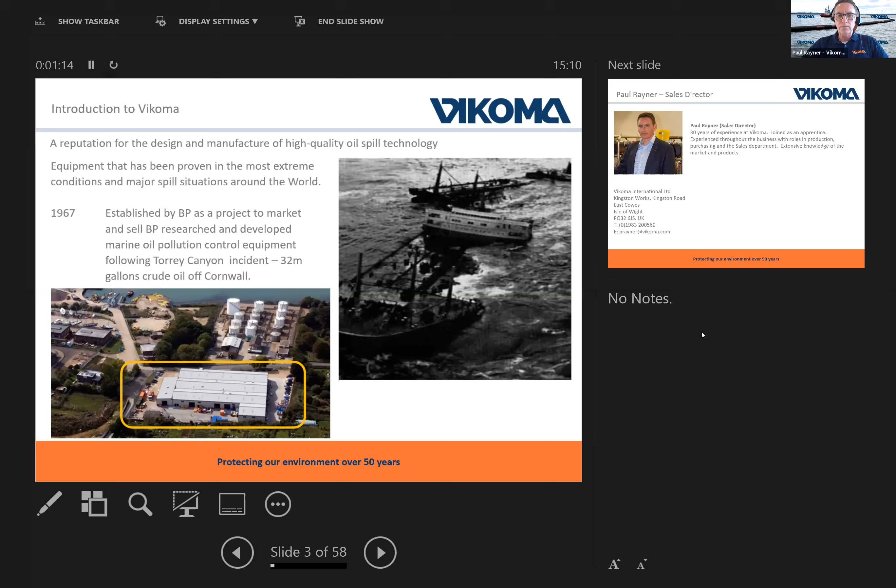Myself, Paul Rayner, Sales Director. I've been with the company, it'll be 30 years next year, and throughout that time I've worked in many departments, a lot of time spent within sales, and as Mark said, a lot of time traveling around the world. Not directly involved with incidents, but a lot of time spent with responders and people actually dealing with oil spills. So a big part of my job and my team's has been to understand the issues that responders have and then feed it back into our development program.

We're an ISO 9001 company, and had the joy of going through the latest version of accreditation, 2015. Importantly, that covers everything within our business - not just sales and development, but manufacture, design, installation, commissioning and training. So it's important to look at all those aspects being covered under the ISO 9001 quality umbrella.

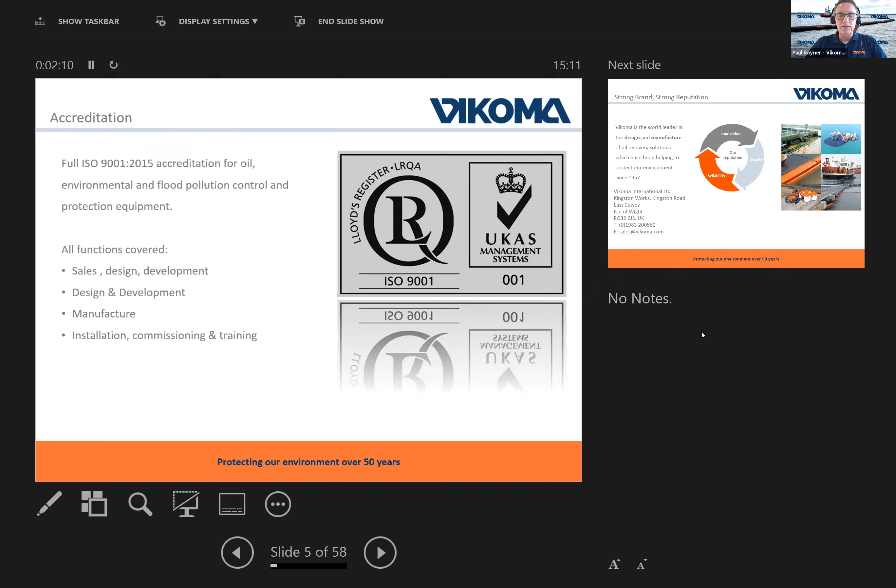Vikoma prides itself on three core values: quality, reliability, and innovation. Quality products that will work when they need to. As you all know, there's not an oil spill every day, but when it does happen, you need the equipment to work. So that's very much the sales pitch.

So what I was asked to look at today was oil spill booms. I thought if you look at the membership of UK Spill, it's very varied. Most people think of oil spill and think of tankers, offshore, major spills. But there are as many spills, far more actually, in ports and harbors, inland - pipelines, rivers, lakes, industrial culverts, industrial sites. So it's not all about big offshore booms.

So today's presentation, I'm really going to cover the main part of what is about containment. I'm going to talk about different types of boom and how I see the pros and cons, and the feedback I've had over the last 20, 30 years from responders on the pros and cons of the different types of boom.

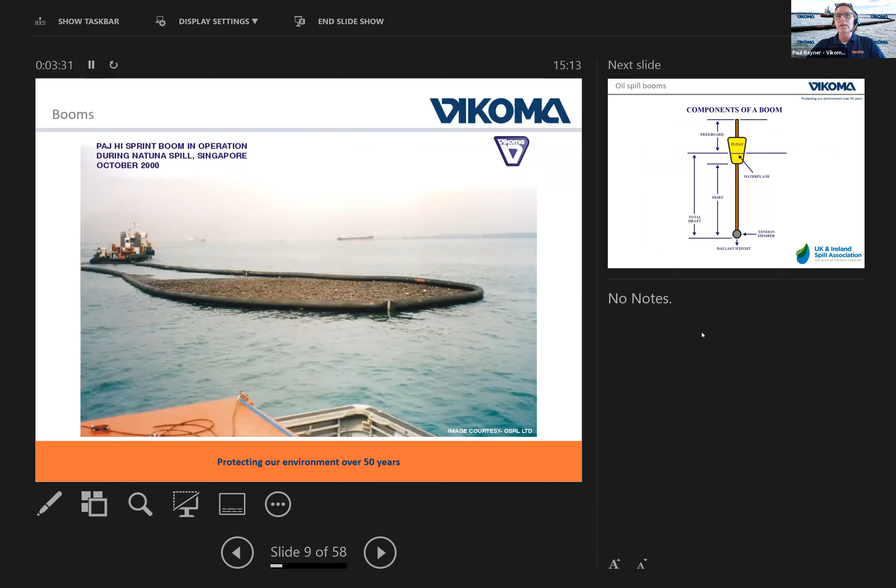So typically, a good picture there - you can see boom being used to contain on a lovely day, lovely spill conditions, nice calm sea - very rarely happens. So how we select booms is really important to what you're trying to achieve as a responder, how you're going to deal with that spill, what type of boom you're going to use and how you're going to use it.

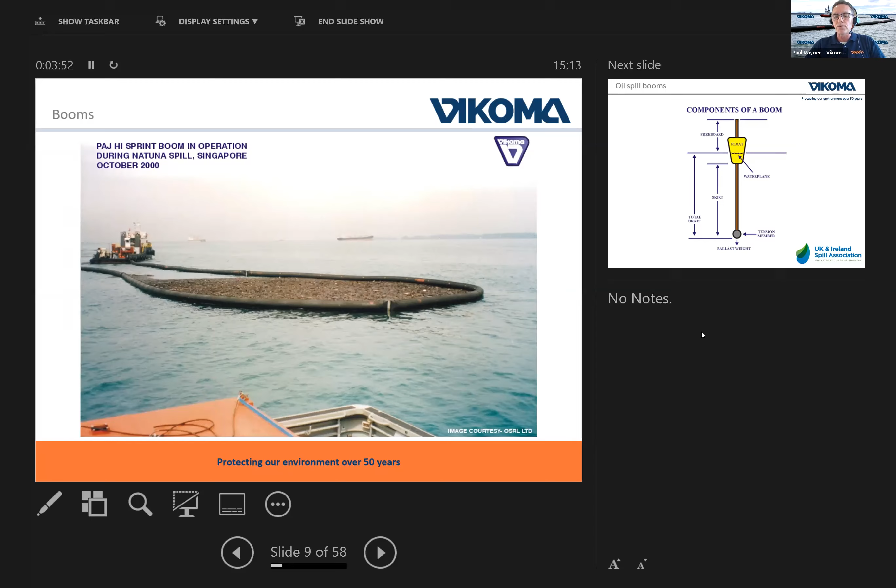So if you start from the real basics of what is a boom, it really is a floating barrier that goes on the water. The components, as just about any book will describe, include some form of float, a freeboard that is above the water, and a draft, usually the skirt below the water. There's a plethora of different versions of what makes up these barriers - I've seen everything from logs being used to really high-tech technical booming systems. But basically they still have the same principles: what's above the water, what's below the water, and the principle of stopping the spill spreading and containing it so you can effectively use your skimming systems to recover it.

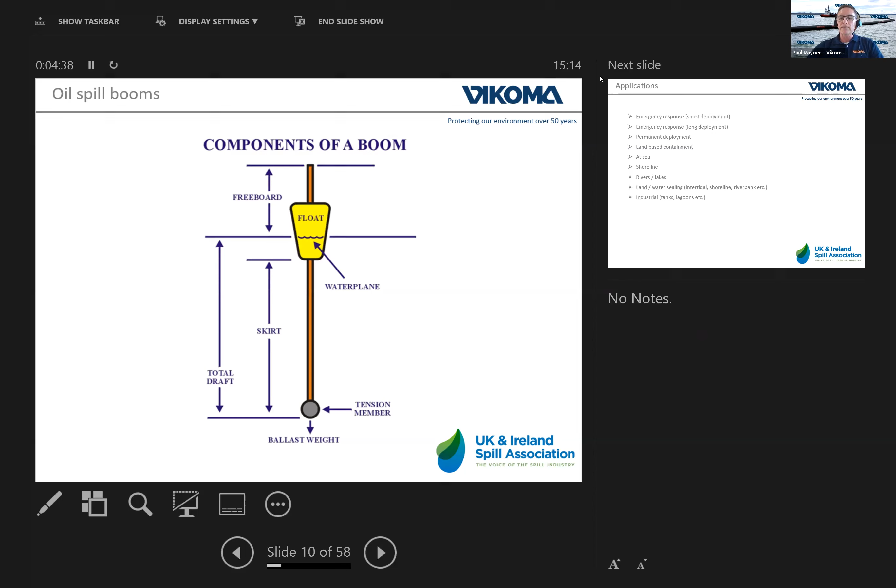So I was trying to think of what are the applications, and there are many different applications. Not only emergency response, which is generally a relatively short-term deployment, but there can be emergency response which is a long-term deployment. So this can be short-term hours, long-term days, weeks, even months.

There's also booms used for permanent deployment, to permanently protect an area, either to stop a spill getting in or to stop a spill getting out. There's also land-based containment - sealing off shorelines, beaches, riverbanks, etc. So you can see straight away how one boom is not going to fit all of these applications. Even down to industrial - we often supply boom systems for fitting into API separators in refineries and petrochemical plants, completely different to response booms. So it really is understanding what your application is.

Many responders have the challenge that they actually respond to many different applications. So it's having a toolbox of different techniques, methods, and equipment, which will allow them to effectively do that.

So I started listing out what I thought was the issues with boom, what really matters. And I came up with a massive list. And I'm sure as experienced responders that many of you are, you could add to this list. But there were simple things like safety, weight, ease of cleaning, ease of use.

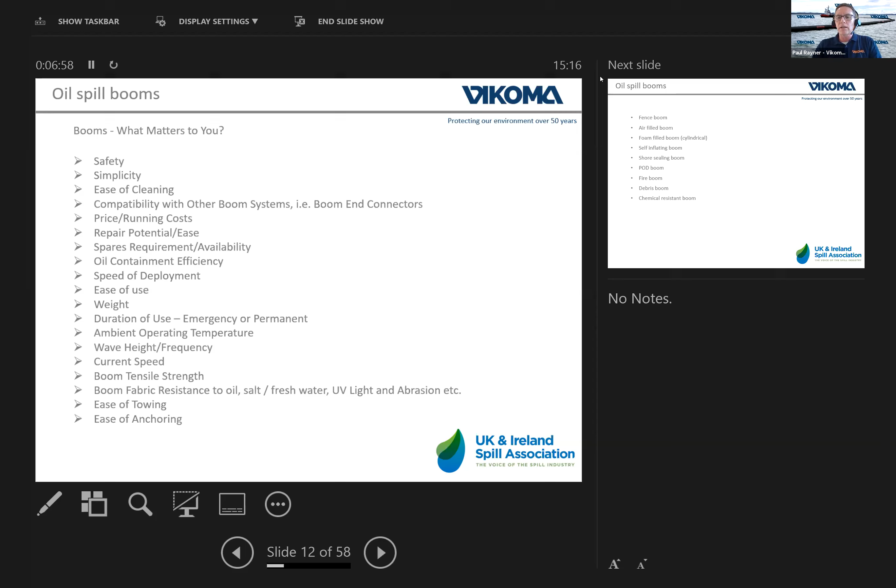So if you look at the types of boom, if you look at the terminology, there are several different types - fence booms, air-filled booms, foam-filled booms, self-inflating booms, shore sealing booms, pod booms, fire booms, debris booms, chemical resistant booms, and that's without going into things like absorbent booms. So you already have this great big list of different types of booms, but what does it really mean?

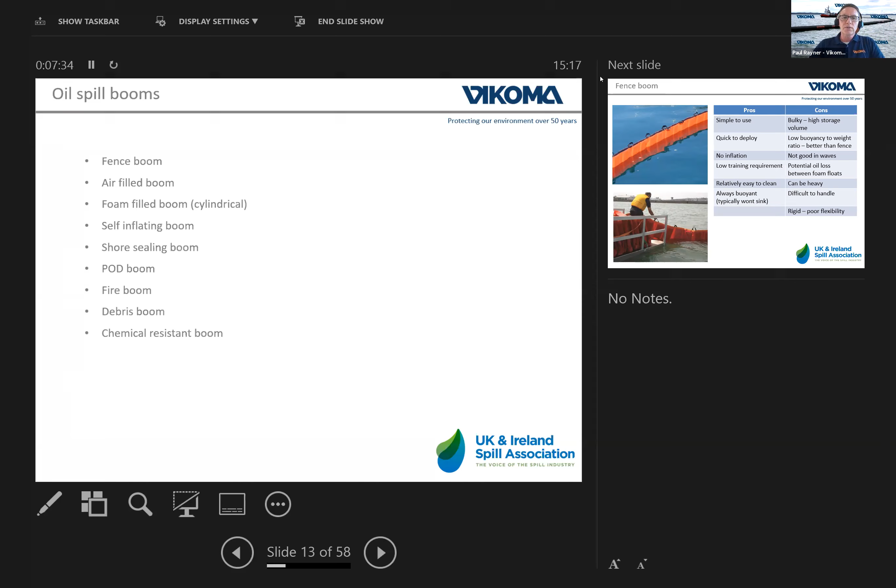I actually thought a very simple way to look at this was to look at some pros and cons. Now this isn't just a sales director's opinion. This is very much feedback that I've had over the years from responders, people actually using these types of booms. So I'm not going to go through all of them verbatim, but if you look at the key points...

Fence booms - really easy to use, really easy to deploy, low training requirement, relatively easy to clean. They won't sink because they've got foam inside. Sounds great. What are the cons?

Big and bulky, can be really heavy. They have a tendency to fall over when it's windy. They're not great in wave conditions. The potential loss of oil between the floats. They can be difficult to handle and they can be rigid with poor flexibility. So some really good points, some really challenging points.

So it really is weighing up what you're trying to achieve. I've seen people that have used fence boom really effectively in ports and harbours and rivers. And then I've seen people try to put fence booms out at sea. It's been windy and the fence booms literally fell over and is planing across the water and not containing any oil whatsoever.

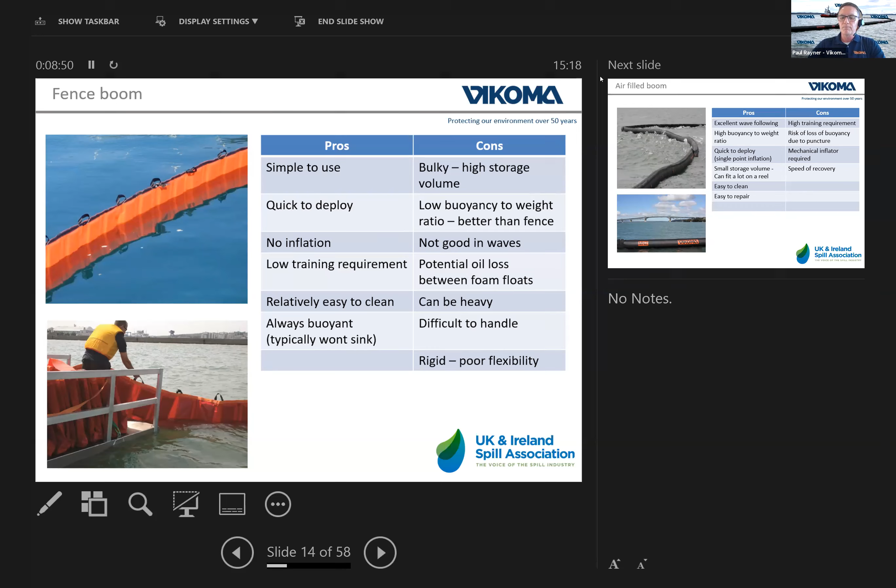If you look at air-filled booms, probably one of the biggest and best known range of booms for offshore use. So really good pros - excellent wave following, generally really good high buoyancy to weight ratio. This means they're able to react to waves. They can be really quick to deploy. So if you take Vikoma, we have single point inflation with our Hi-Sprint boom, which allows really rapid deployment.

Generally small volume, because it's air inflated buoyancy, you can store them on reels, so you can have quite a lot of boom on one reel. They're generally easy to repair.

What are the cons? Generally, you need a higher training requirement. You need people who know what they're doing. There could be a risk of buoyancy loss due to puncturing. You do need mechanical inflation. They can be slower to recover. So again, it's about weighing up the different pros and cons of each boom system.

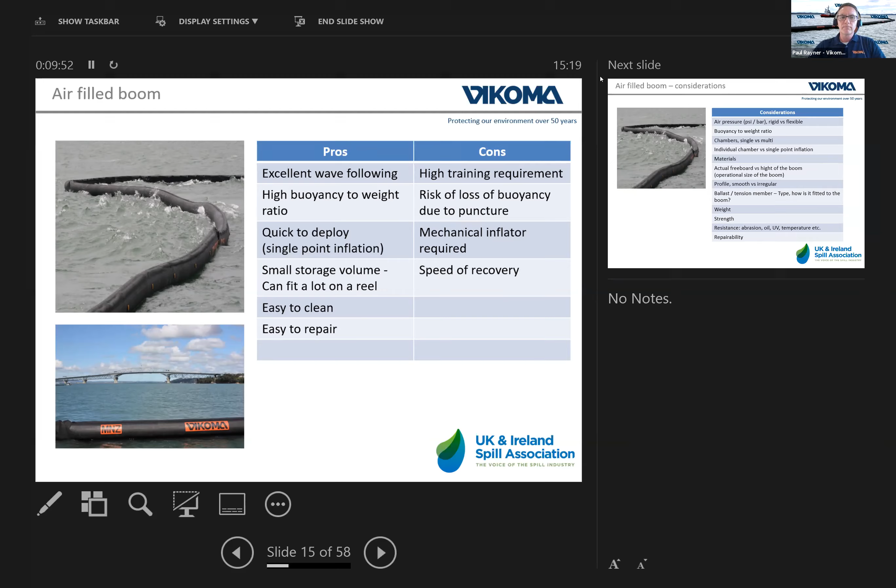And if you look specifically around air-filled booms, what are the considerations? Air pressure, for example, whether it's in PSI or bar - what does it mean?

Low air pressure is flexible, higher air pressure is more rigid. So this is how it's going to react in a wave condition. Something that's hard and rigid is going to be difficult to move around. Something that's soft and flexible will easily move around.

Considerations like chambers, one chamber or multiple chambers - this is going to give you more integrity. The types of material, the actual measurements of freeboard and draft. Operationally, what are the measurements?

I've seen many people talk about huge booms, but how big are they when they're inflated and actually in the water? I've seen tenders which state the flat width of a boom. Well, you don't use a boom when it's flat, you use it when it's inflated.

The profile of the boom, smooth versus irregular, how that might affect oil loss. What sort of tension or ballast member is used and how is it fitted to the boom?

What's the strength of the boom? What's the weight of the boom? How easy is it to repair? What's its abrasion resistance? If this is going to be dragged across a quayside or dragged down a pontoon, then you could well have issues with abrasion.

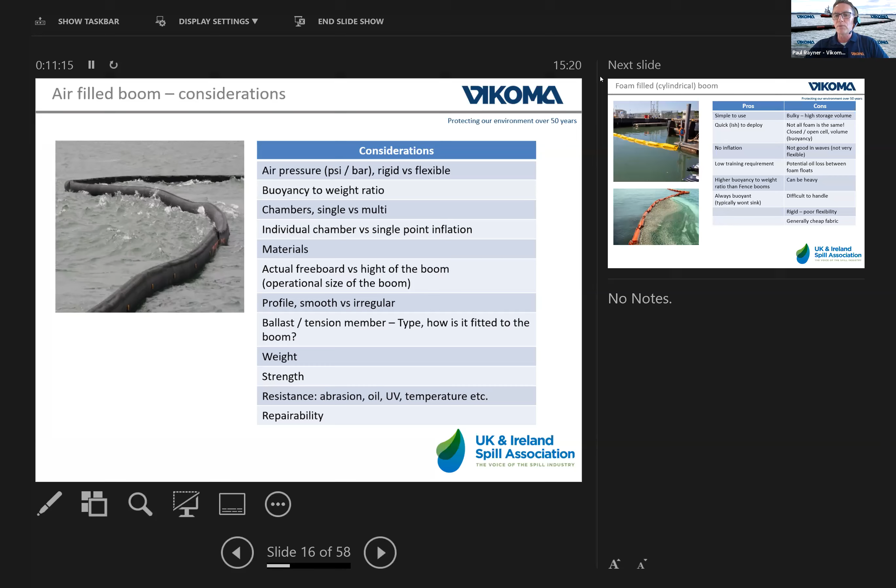A very common boom, particularly in the States, is foam-filled cylindrical boom, often referred to as contractor boom. So again, you look at this, really simple to use. If you go to spills like the Macondo spill, they used miles and miles of this sort of boom. Really quick to deploy, no inflation, low training, higher buoyancy to weight ratio than fence booms because it's cylindrical foam, and they won't sink.

What are the cons? They're big, they're bulky. Not all people use closed cell foam. I've seen wonderful fence booms and cylindrical foam-filled booms with open cell foam. Open cell foam is a sponge - it gets wet, it fills with water, it sinks. They're not overly great in waves because each one of those foam billets is rigid. They can be difficult to handle, heavy to use, heavy to pick up. Generally they're lower cost fabrics because a lot of the strength goes into the tension members. So again, pros and cons.

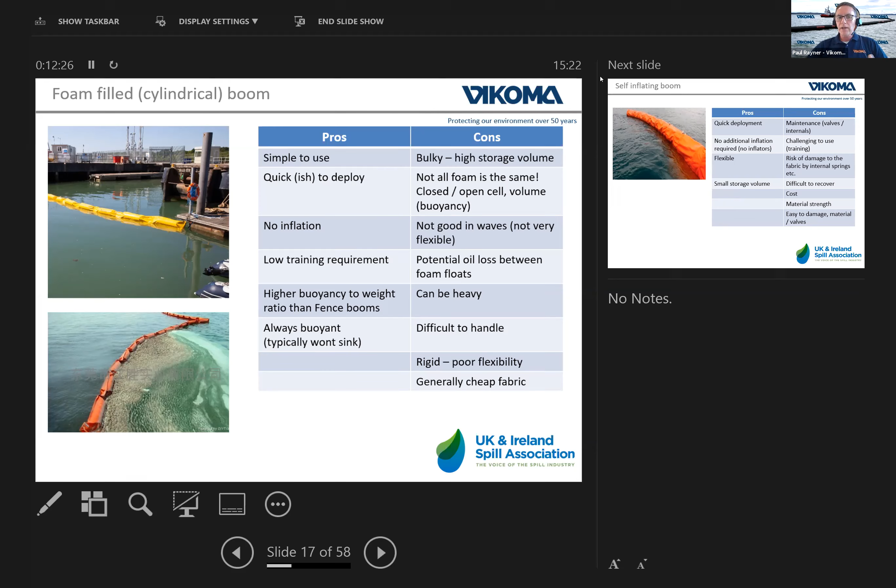Self-inflating boom - this was really popular many years ago. When I first came into the industry, everyone was talking about self-inflating boom. Great, you can chuck it out and it inflates very quickly. So again, the pros: quick to deploy, very important in a spill, generally flexible because it's air-filled, small volume.

What are the cons? Maintenance - you've got all these internals inside this boom, metal and plastics inside a fabric bag. They can be difficult to recover, expensive, and easy to damage because some will have valves poking out the top, some will have mechanical springs inside. So again, really weighing up what you're trying to achieve, the level of skill you have as responders, and how easy you can use this equipment.

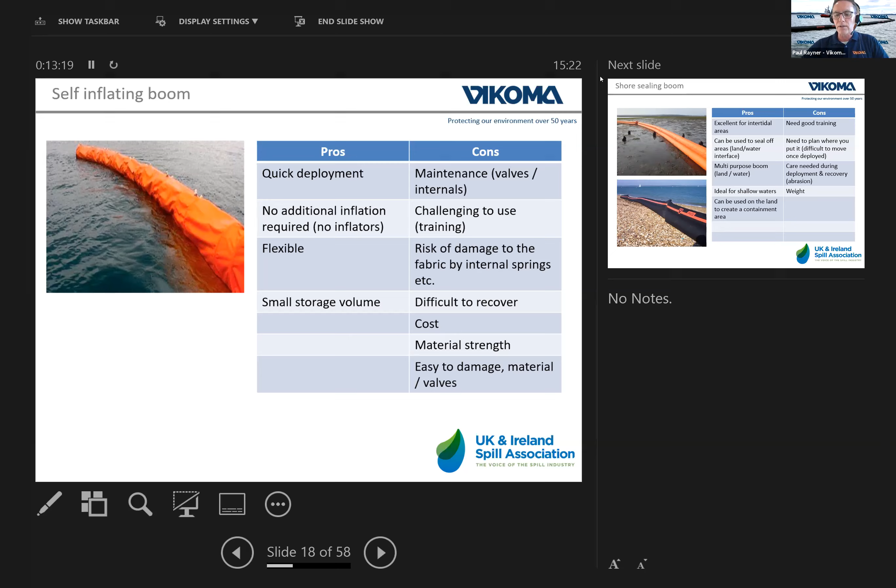Shore sealing booms - originally designed for that intertidal interface between the water and the land, but often used on land spills, not just for the beach where it was originally designed many years ago. This is excellent for intertidal areas, seals against the ground at low tide, and floats when the water comes in - ideal for sealing off. Some crossover for holding back water too, for sealing off an area during operations. Very recently, a lot of Vikoma boom was used on a salvage operation where Shore Guardian boom surrounded a vessel being dismantled and salvaged, so it can be used on land as well as this land-water interface.

The cons though: you need good training, people who know what they're doing. Once you put them out and filled them with water, they're not going to move unless they're floating, so you need to think about and plan how you're going to use it and where you're going to put it. Definite care needs to be taken during deployment and recovery because of abrasion - these are designed to sit on the ground, so it's no good having a weak, low-cost material that's going to wear through quickly, because you'll lose the effectiveness of that boom.

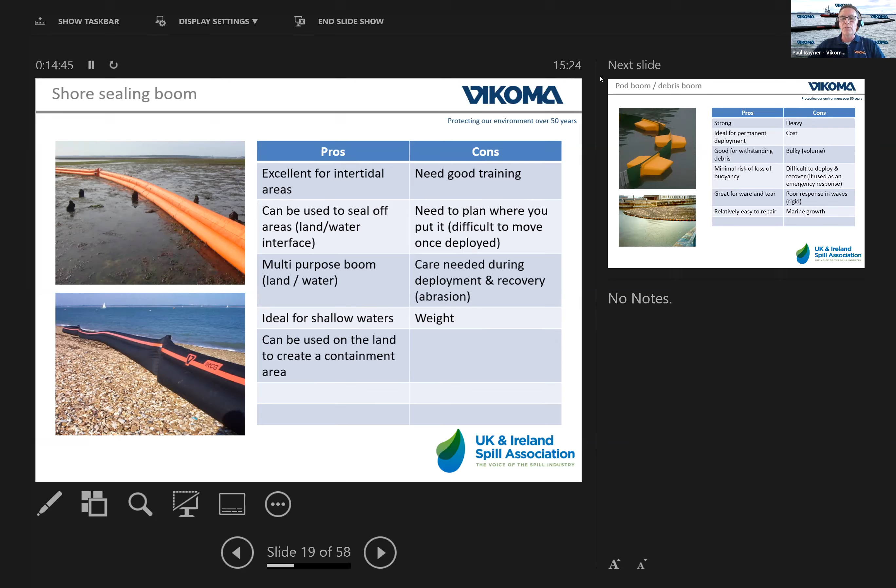There's also pod or debris booms. These are really strong booms, often used to hold back debris as well as oil. The pros: really strong, ideal for permanent deployment, good at withstanding debris, usually made of high strength materials, good for impact, great for wear and tear, and relatively easy to repair.

A lot of the pods are bolted to the belting. What are the cons? Heavy, really difficult to deploy, so they're not ideal for emergency response. They can be incredibly bulky. So how are you going to pick them up? How are you going to move them? How are you going to deploy them?

And there can be big issues with marine growth, the same as with any permanent boom. Once a boom is deployed permanently, marine growth often starts growing onto it, basically reducing the buoyancy because of the extra weight. I've seen permanent boom that hasn't been maintained basically starting to sink. But with all these things, pros and cons, what are you trying to achieve? What's your objective?

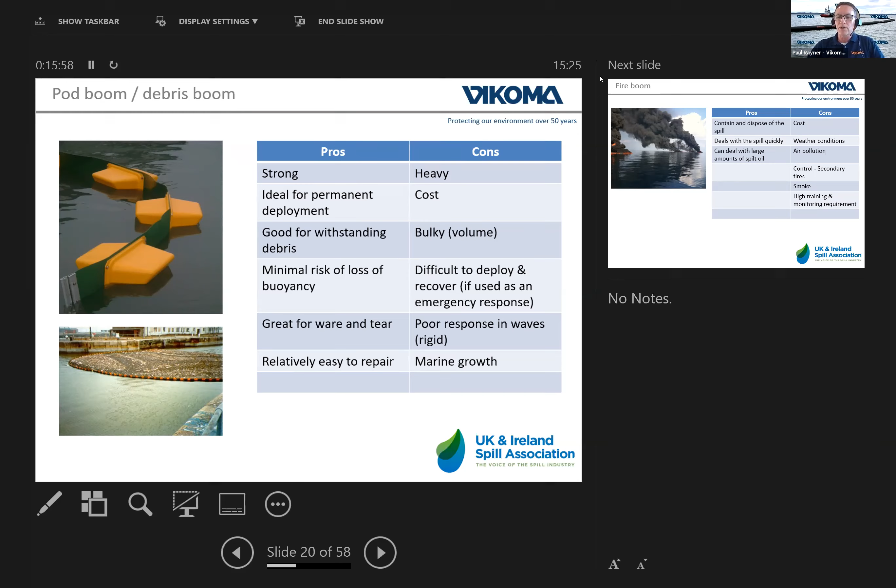Going to touch on fireboom really briefly. I believe it's a subject for a future webinar. There was really great publicity for firebooms during the Macondo spill - the ability to contain and dispose of the spill in one go. It can be done quickly because you're disposing with it, and it can deal with large amounts of oil.

What are the cons? Costs, weather conditions, air pollution, and training again - having the correct level of training. You'll see a theme through all of these boom types: generally, unless it's a simple throw-it-in fence boom or contractor boom, you do need well-trained people. I believe Mark will cover some of the issues around training.

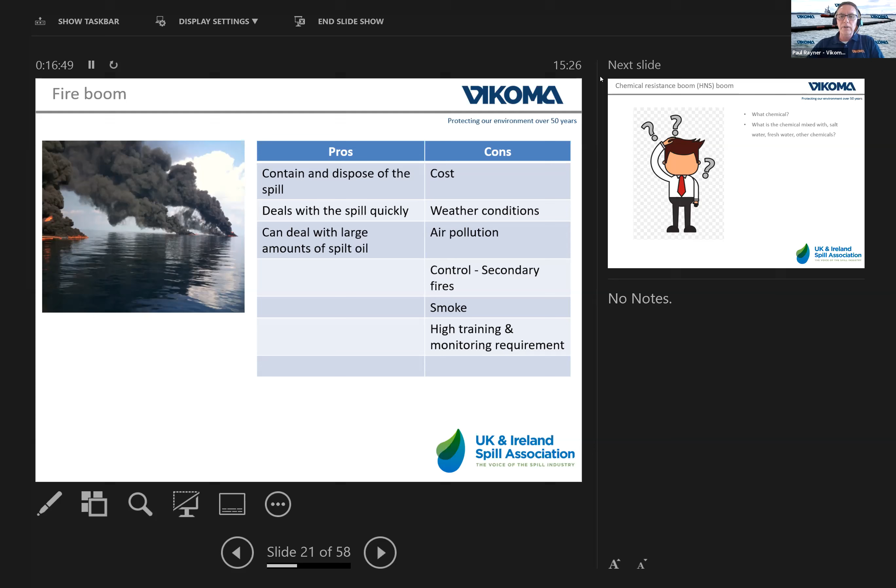I thought it poignant to touch on chemically resistant booms. There's a lot of talk about HNS within OPRC, so booms that are going to be able to hold back chemicals. I thought about trying to put a picture on this and thought three question marks with someone scratching their head was probably a good way of doing it.

What's the chemical? What happens when it mixes with the water? Is it salt water? Is it fresh water? Is it mixed with other chemicals? How diluted is it? What's it going to do to the material? I see this as a really big challenge for the industry going forward as HNS protocols are adopted as part of OPRC legislation. What equipment are we going to use?

There's a lot of equipment for land-based HNS, but for marine-based, some chemicals you can't see them, some chemicals you can't go anywhere near them, some chemicals will destroy things. I think this is going to be an interesting subject over the next few years as both the legislation rolls out and the industry adapts to be able to deal with it.

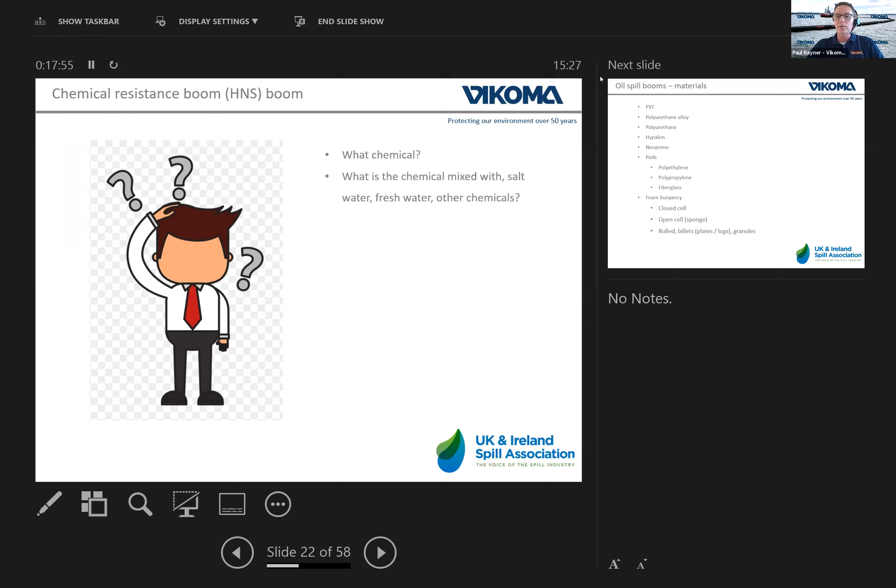If you look at all those types of boom, one of the key elements, one of the most important things, is the materials they're made of. Generally speaking, there are a couple of groups of materials: thermoplastics like PVC and polyurethane alloys, and rubber products like Hypalon and neoprene. Then if you go into things like pods, it's often polyethylene, polypropylene, or even fiberglass.

It's important to note there's a huge difference in what all of these materials are. As I mentioned earlier on foam - closed cell foam versus open cell foam, rolled billets, plates, logs, granules - they're all factors you need to consider when you're actually purchasing a boom.

People will talk about, okay, I know exactly what I need, I want a cheap boom, I'm going to make it out of PVC. Nothing wrong with PVC, fantastic material. But how long do you want the boom to last? What are you going to do with it afterwards?

How are you going to clean it? If you've got to dispose of it, where can you dispose of it? How can you dispose of it? What's the life cost of that boom?

People have said to me, Vikoma is well known for neoprene booms like Hi-Sprint, and they'll say I can buy 2 or 3 PVC booms for that cost. And I said, yes you can, but you've got to dispose of those 2 or 3 PVC booms, and you can still use my neoprene boom. So what's the cost of that disposal? What's the cost of replacing it? What's the cost of purchase?

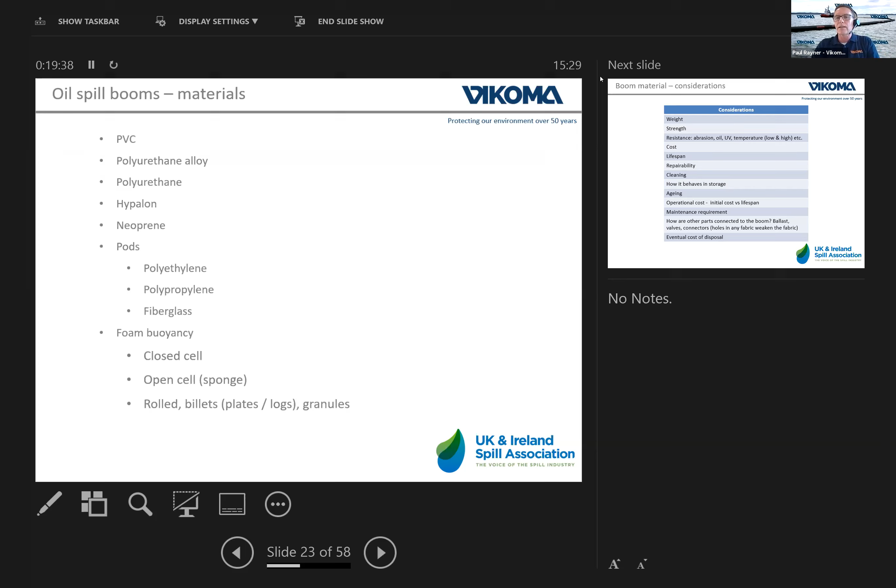So it's quite an interesting point to understand the different types of material used in oil spill booms. Again, I thought it useful to put in some considerations, things like weight - I could make a bulletproof boom out of fiberglass, but you'd never pick it up. The strength, its resistance to things - quite important things for an oil spill - abrasion, oil.

It's quite important to know how good it is with oil, UV, and temperature, both low and high. Low temperature is a big issue with thermoplastics.

High temperature is a big issue with thermoplastics. Where are you going to operate? Perhaps low temperature is not an issue to you, but UV light is. If you're going to deploy for long periods of time, what is the UV breakdown likely to cause to that material? What's the lifespan, how long is it going to last?

Remember, a lot of the time this is in storage. How long can you store it? What conditions are you going to store it in? How easy is it to clean? What are the issues as it ages? How much will it cost to look after it?

How are other pieces connected to that material? If you think of any fabric material, as soon as I start making holes in it, putting bolts in it or valves in it, I actually start damaging that material. So it's really important to think about how items like connectors and valves are fitted into these booms, into these fabric products.

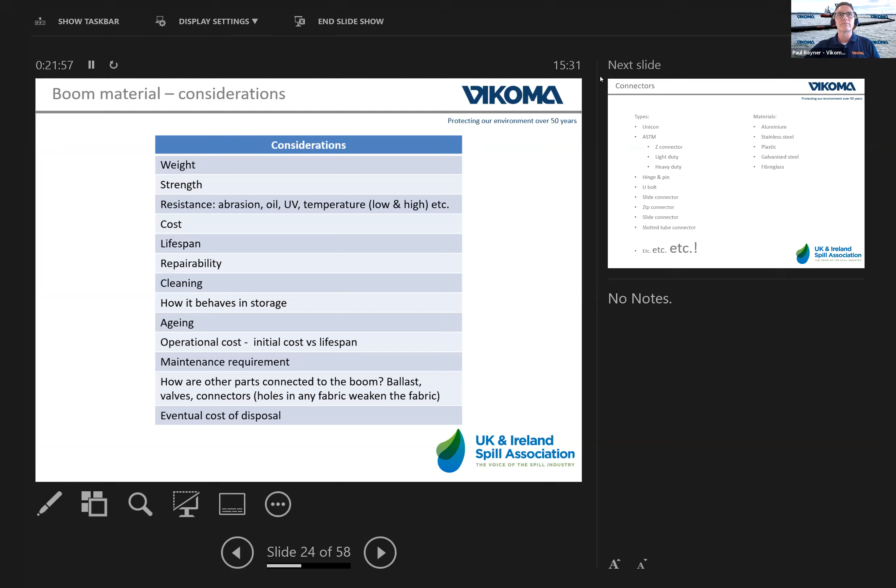I then thought a useful topic to cover would be connectors, and then I realized how complicated this was. So I started listing out connectors: Vikoma, well known for Unicon, ASTM, a US standard quite well adopted across the world, but there are several types of ASTM connector—hinge and pin, U-bolt, slide bolt, zip, slotted, and on and on.

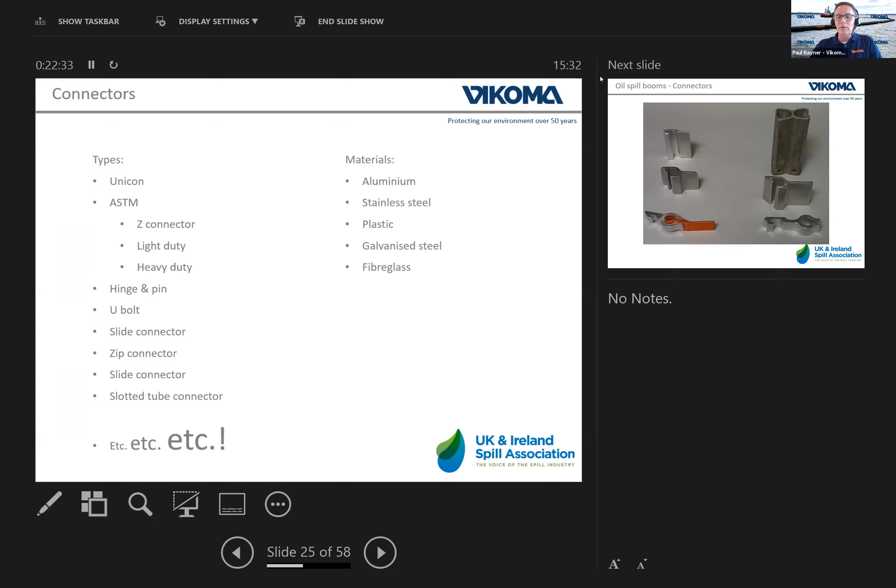There's also the materials of what those connectors are made of: aluminium, stainless steel, plastic, galvanized, fiberglass—a whole plethora of materials. So I thought I'd get some pictures, lots and lots of different types of connector, even more different types of connector. Lo and behold, they don't all fit together.

So we were talking in previous webinars about standards. ASTM in the States have tried to push these standards so that booms can connect together, but this is only really widely adopted in the States. Even there, there are a plethora of different types of connector, and they do not connect together. It really is the square peg in a round hole. So it's really important to understand what type of connector, how that's fitted on the boom, and then how you use it.

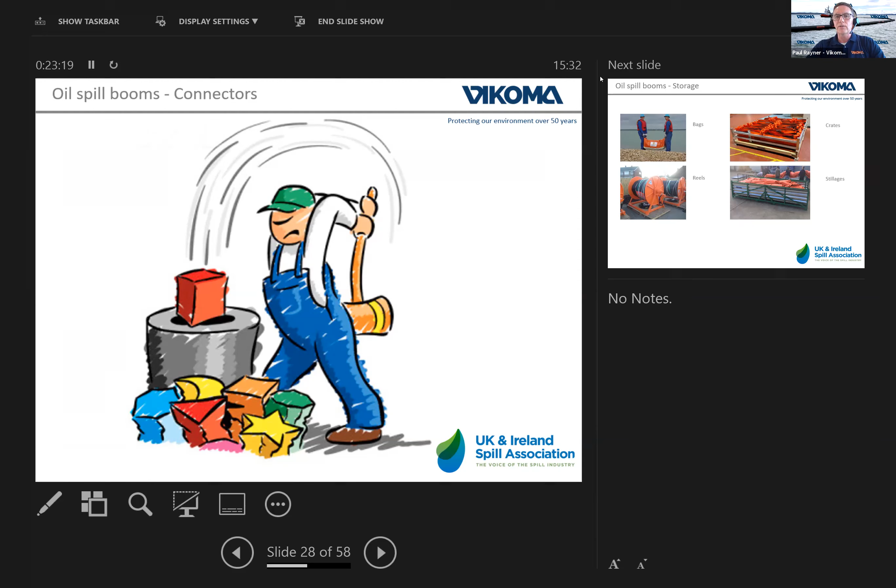I then thought it useful to talk a little bit about storage. Everyone thinks about the oil spill boom, but 90% of the time it's in storage. So how are you looking after it? How are you storing that—whether it's bags, reels, crates, stillages.

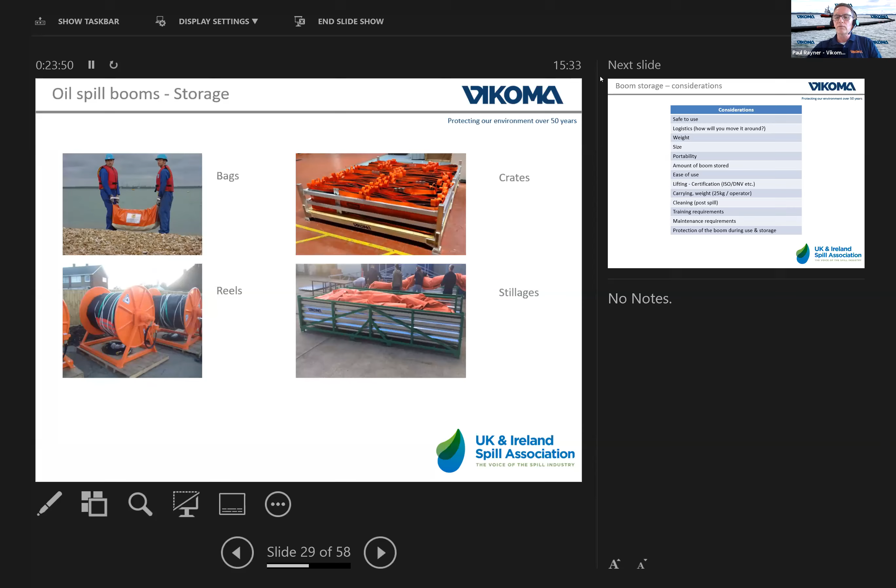All of these things are quite important to understand when you're initially purchasing. How are you going to look after it? How are these different types of storage going to be employed for deployment and recovery of that boom? Unfortunately, in my experience, a lot of the time people do forget about it. So considerations: weight, logistics, how am I going to move that around?

I've seen people say, great, I want a reel. And I say, great, where's your crane? I haven't got one of those. Well, how are you going to move it? I've got a fork truck. How are you going to take that on the beach if you need to take the reel down there? So it's really important to understand the logistics.

If you're going to have bags, carrying weight for one operator is 25 kilos—no good having a boom that's 200 kilos if you're expecting people to pick it up and carry it. Training requirements: how are you going to use that? Storage when it's not in use—where are you going to put it? Is it going to be indoors? Is it temperature controlled if you've got extreme climates?

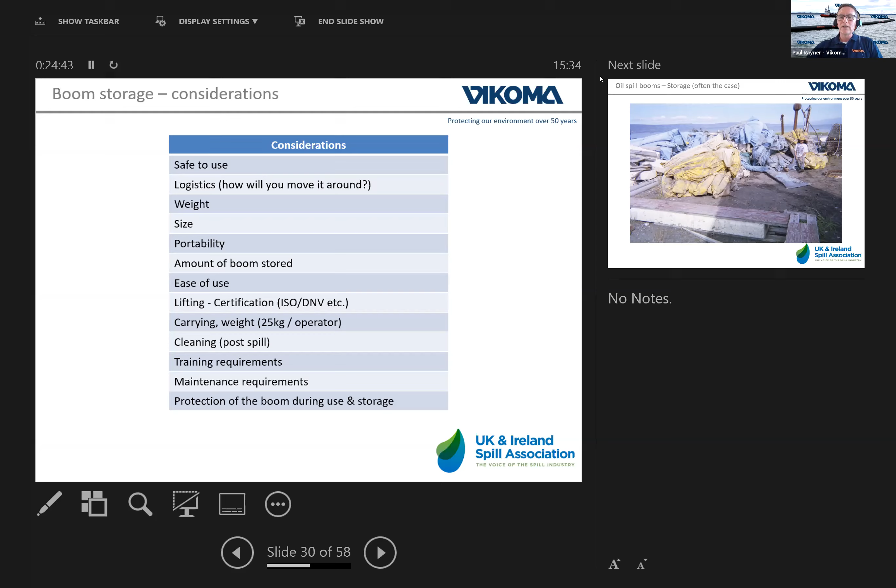In my experience, unfortunately, a lot of booms—that's how it's stored. Great big heap, not cleaned up very well, but that's expected to work next time there's a spill. I made sure that it wasn't anyone I knew, but these are definitely things to consider.

And then, to wrap things up, how do you go about repairing booms? Now, we all know, no matter how well trained you are, no matter how well planned you've done things, accidents will happen. There'll be debris in the water or things will get abraded.

So what are the different methods? Very typically, cold glue, like fixing a bicycle repair. Vulcanized, something Vikoma is really well known for, where we can repair the boom as strong as the original manufacturing. Mechanical seals - if you've got a rip, you can put one of these and clamp a seal over the hole.

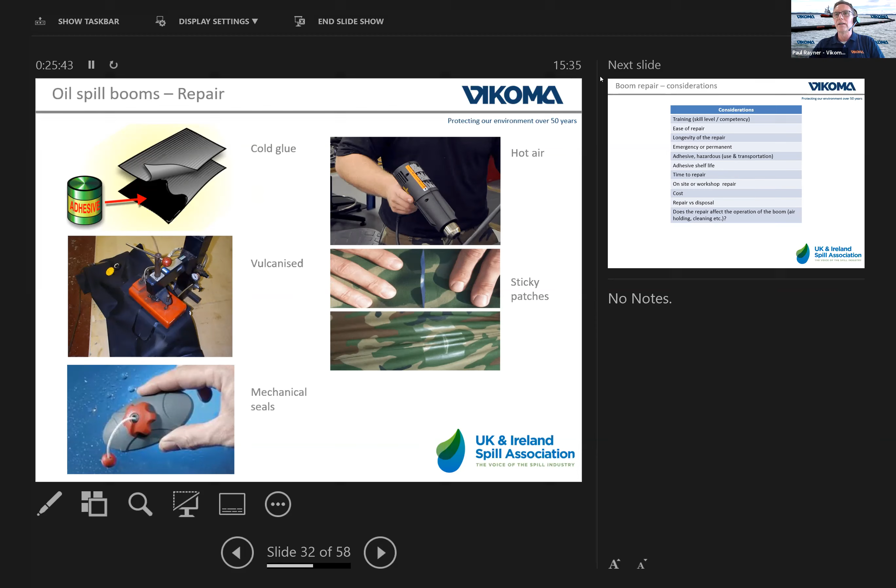Hot air. Sounds easy. One of the most difficult repairs I've ever tried to do in my life - really easy to burn a hole straight through the boom. Sticky patches - you can actually repair a boom with a sticking plaster.

But again, what are the considerations? Training and competency, ease of repair, longevity of repair. If you're using adhesive, what's the shelf life? Once you open that 5-litre tin and you only use half a litre of it, how long does that adhesive last after you've opened it?

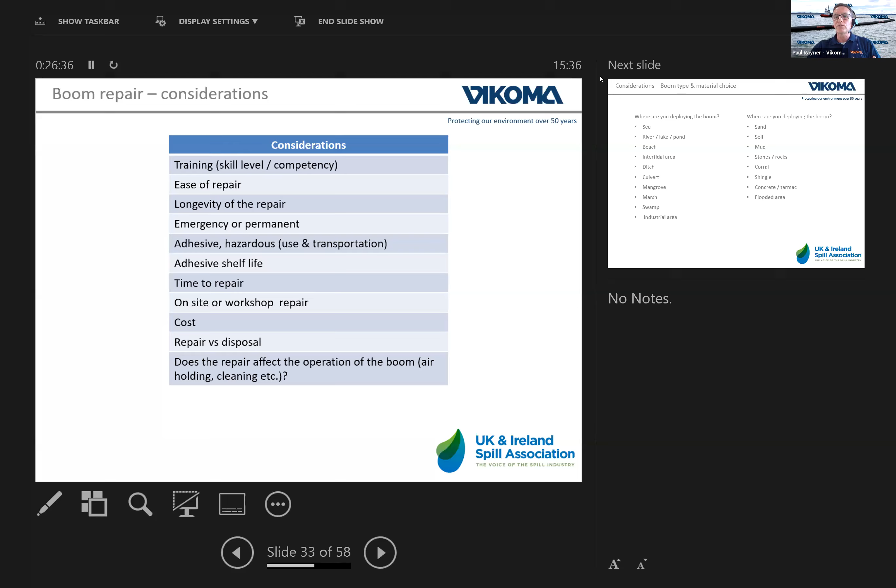Can you do a repair on site at the spill site and still go on dealing with the spill, or does it need to go back to the workshop? Repair versus disposal - when is it commercially viable to repair versus commercially viable to dispose? And most importantly, does the repair affect the operation of the boom itself? This is not only the air holding, if it's air filled, but how you clean it afterwards. Are you going to actually cause more damage? All important things to consider.

I thought the other things to consider would be things like, where are you deploying? What is the application? Deploying at sea is completely different to deploying in a swamp, completely different to an industrial area, completely different to a mangrove, completely different to a beach.

If you're deploying in an area where there's land involved, or it's going to drag on the bottom of the seabed, or it's shallow water - what sort of area are you deploying in? Sand, soil, mud, coral, shingle, tarmac. It could be a flooded area where you've got tarmac but lots of water. You could have areas where it's merrily floating in the water, no problem, and then as the tide goes out and recedes, you're suddenly on top of coral. And coral will rip fabric to pieces. So very important to understand what it is.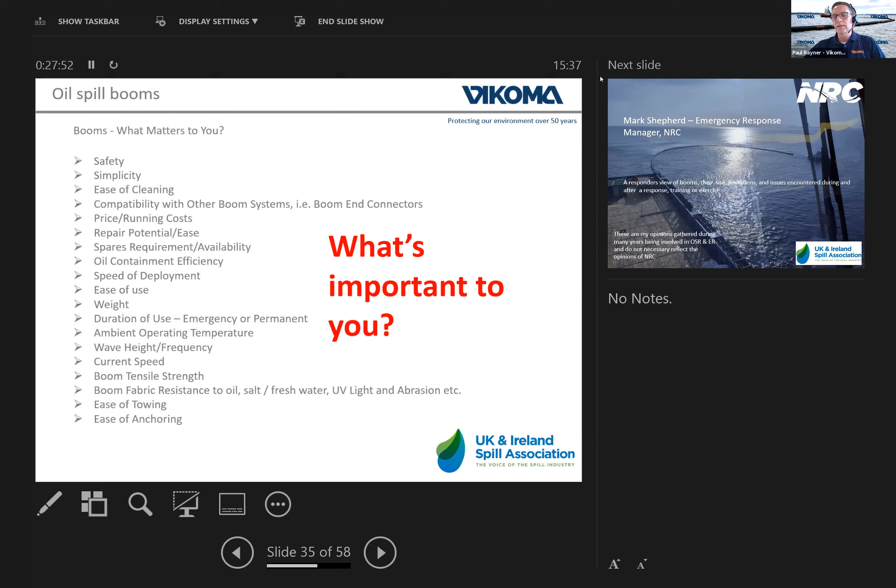So I go back to my original slide of booms - what matters. And really, it's an open question to you all to think about what's important to you. So that's the pitch from the manufacturer. What I'd like to do now is pass over to Mark, and he's going to talk about it very much from the responders' point of view.

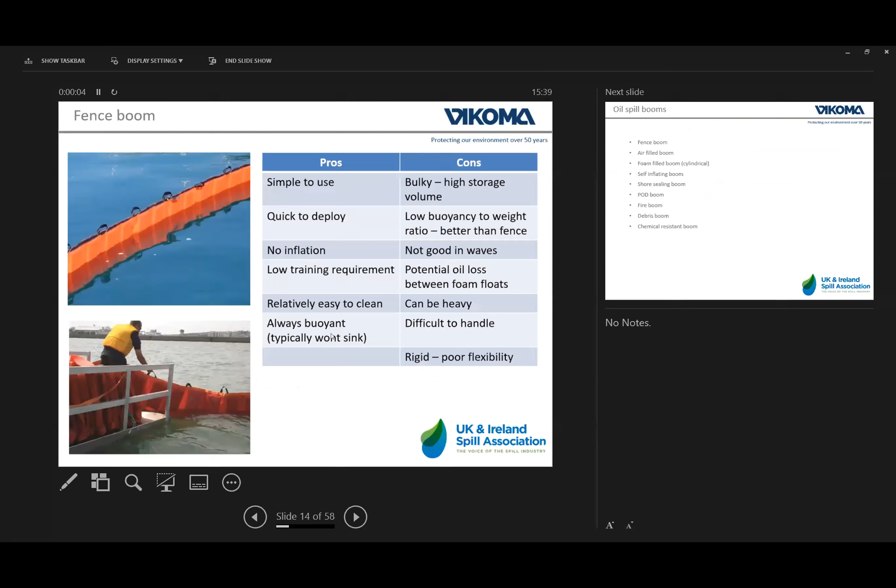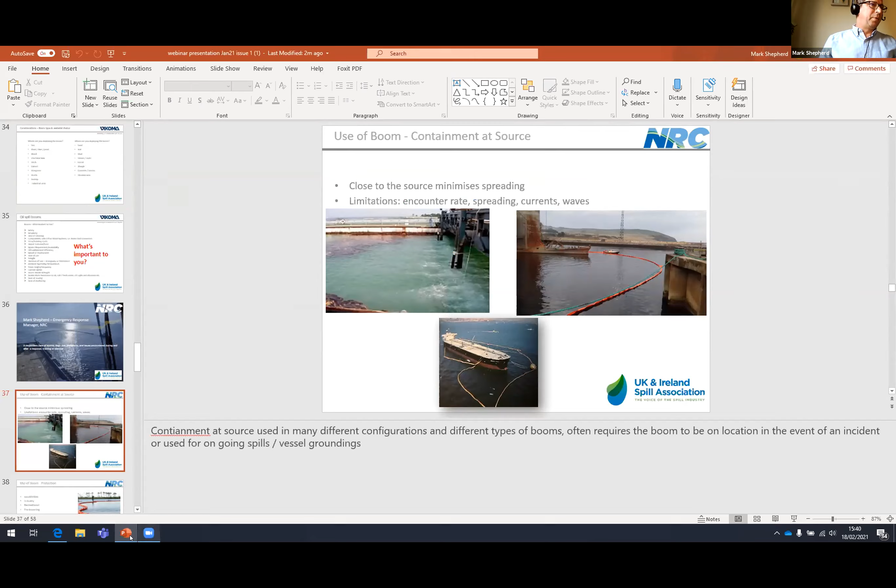Thank you, Paul. I'm just going to pull my screen up, I think. Technology will let me down as usual. Right, I need to change these. Bear with me. Sorry about this, I'm having a bit of a technical issue going on here. Which screen can we see? We can see you at the moment. All right, just me, just you. What's going on with my shared screen then, Mark? Help. Share screen. Yes, share. We've got your home page. You got my messy desktop at the moment. Okay, so where's my... Oh. No, I don't know what's going on. We'll have to... Mark said to me, stop, make sure you... oh, the presentation's closed down, that's why. Make sure you close everything on your desktop first, which I have done. Right, now then, let's go back. Share screen. Share. Right, hopefully. Hey, and now if you go to slideshow, and then from the start, or from where you are. Yeah, that's it. Have you got full screen of that, not the notes? No, we're seeing your presenter view at the moment. We're not seeing the full screen. There you are. Right, why is that then? How do I change screens? This isn't very good, is it? Now just go. Yeah, no, I want the full screen on, but I'm struggling with that. Okay. Okay, we'll have to go with the notes with the. Just click this. Yeah, but there's a way to. All right. That's better, isn't it? Yeah. That's it. That's the one. All right, sorry about that.

You want to get to your first slide then, Mark? Yes, lovely. My apologies for that technology - this is the first time I've really done a webinar on this system, so excuse me for that. As Mark said at the beginning, I'm Mark Shepherd, the Emergency Response Manager at NRC based in Old Meldrum, Scotland. I've been involved in oil spills and emergency response for many years now, both from a response point of view and from an incident management point of view.

So the intent was for me to look at following on from Paul's very in-depth presentation, which covered most of the things I want to look at, just to look at how things come from a responder's point of view and considerations.

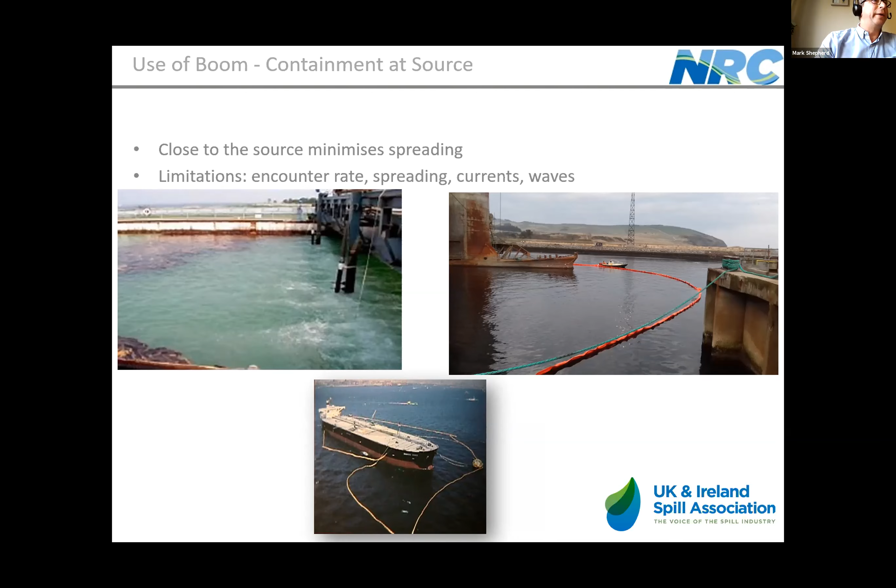So initially we'll have a look at the use of booms. Paul's talked about the types and where they are, and some of the uses - things like containment at source, often used to minimise the spread of a spill at source. Obviously for this you need to have hopefully the boom in place for quick deployment and train people on site, or it'll be used in an ongoing incident such as a vessel grounding where there's either a slow steady release coming on or a potential of a release. So like I say, this really needs the equipment to be there on site and ready to deploy. The reality is that never really happens because there's all sorts of other things going on when there's a spill happening, and getting the boom out is probably one of the latter considerations.

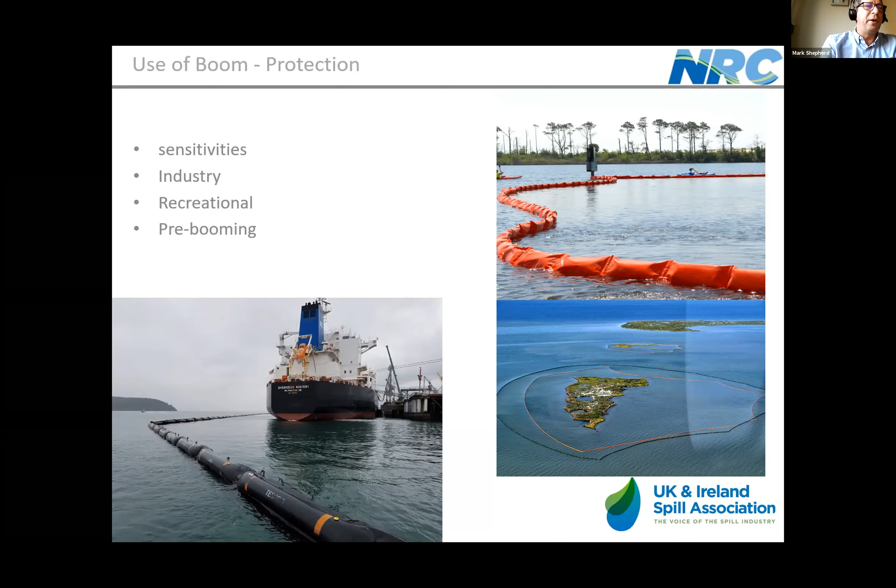Using booms for protection, again, a good strategy in pre-planning. If you know where your sensitivities are, get your boom out. In the event of a spill, from your modeling, you'll know the drift and direction of the spill, likely times of impact to sensitivities, shorelines and things like that. Also used for ship-to-ship transfers when there's fuel operations going on. A lot of terminals, marine terminals have it for when they're loading and unloading tankers. And we see quite a bit up in Scotland when the rigs come in for some maintenance or some repairs to be done - there's often pre-booming done in place there as well.

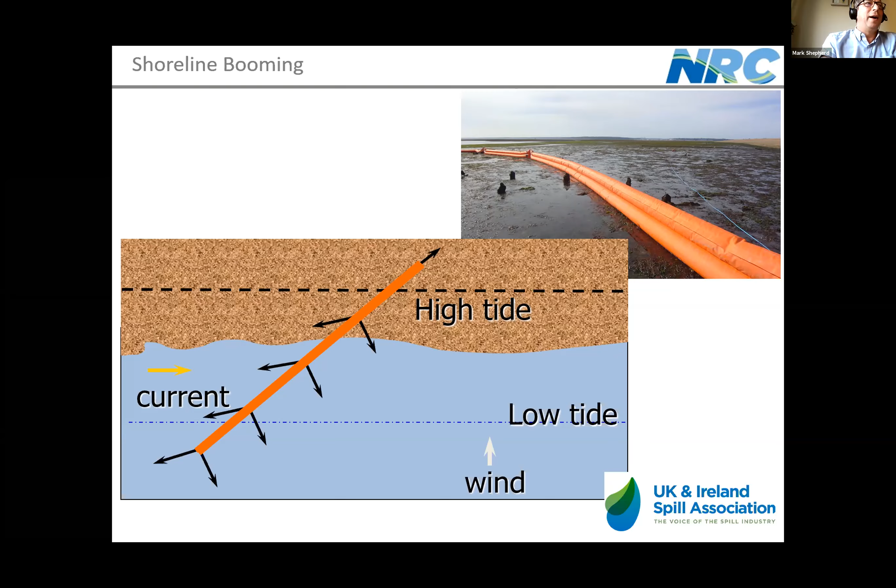Paul touched on the use of the shore sealing boom - really good boom when deployed correctly on the right beaches or on land now. It's a single air chamber with 2 water chambers in almost a figure of 8 configuration at the bottom. Get it in position and then fill it up with water, and it's great. Get it in the wrong position, fill it up with water and try and move it, good luck. Likelihood is it's not going to move without pumping all the water out or pulling the boom apart. And you'll see a bit later that that can happen.

Offshore, we see quite a lot - Paul touched on that, the big booms, the neoprene air-filled booms, many different types of boom. And depending on how quick you can get it out and the vessels that are available to you, it can be an effective strategy. We'll leave that one as a responder's decision. Some people have an opinion on the effectiveness of it, and others say it could be 20 to 25%, 30% effective. But it's a strategy, and it's good to get it out there.

We do a lot of offshore booming, a lot of training with the offshore booms of different configurations. And I think the one thing you need with all of this is competent and trained personnel. So it's not just the crew members or the people on the back of the deck deploying the boom, but the captains or the navigators on the vessel need to know how to put that in.

So normally you'll deploy the boom and go for one of several configurations, either a U configuration. The U configuration gives you a very wide swath width. If you deploy 200, 500 meters, 400 meters of boom, it will give you a good wide swath configuration, good encounter rates, and based on that you need 2 vessels - a main vessel to pull, a good vessel to pull it along. A lot of times vessels think they're too powerful for this kind of boom.

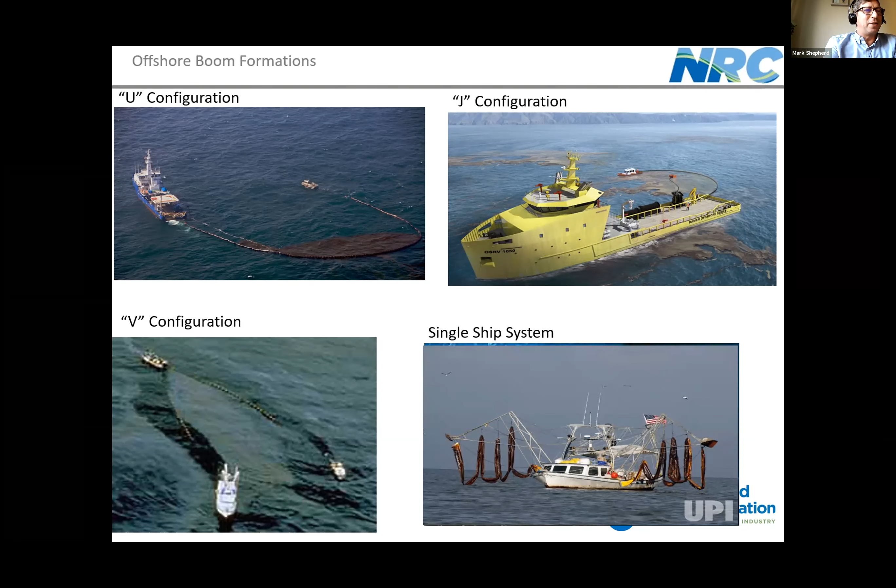This was done on the Gulf of Mexico. Never seen something quite like it. It looks quite complex and tangled, but effective. Anything in an oil spill is useful.

River booming. Again, pre-planning is very important when you have the potential for spills on rivers. They're often faster currents, fast flowing rivers. I know the river currently opposite my house at the moment is flowing very deep and very fast as all the snow and rain we've had up here.

So pre-planning for this, having tactical response plans, knowing the locations to deploy boom, access for that, and where good recovery points are. So you can use the boom to deflect the oil to an area on a bend where the water's slower, and you've got good access to get all your equipment down and recover from.

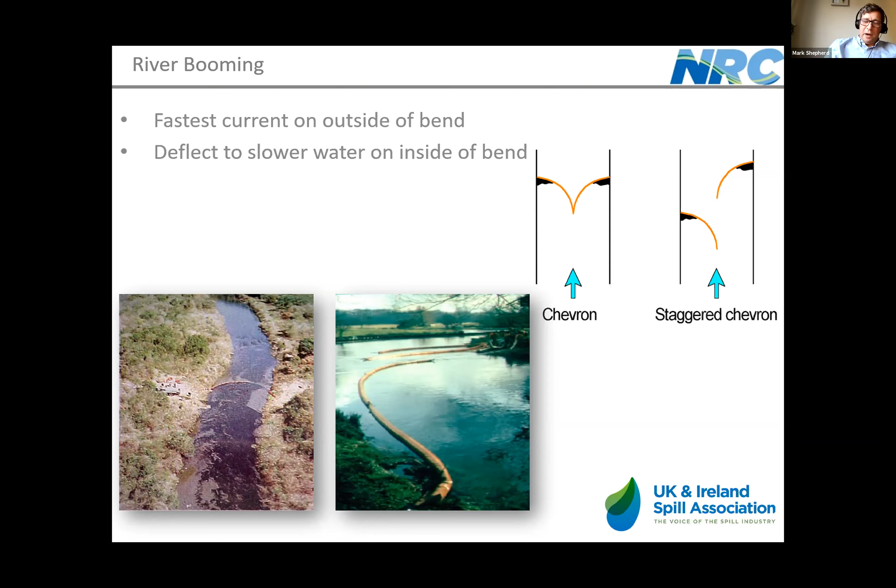Paul touched on fire boom. In situ burning is a very effective strategy. Does rely on pre-approvals a lot of the time. There were over 411 successful burns done during the Deepwater Horizon. So it is effective.

And it's also a very good strategy for oil spills in ice as well, or ice conditions. Like Mark has said, there'll be a special session on fire booms in June, I think it is.

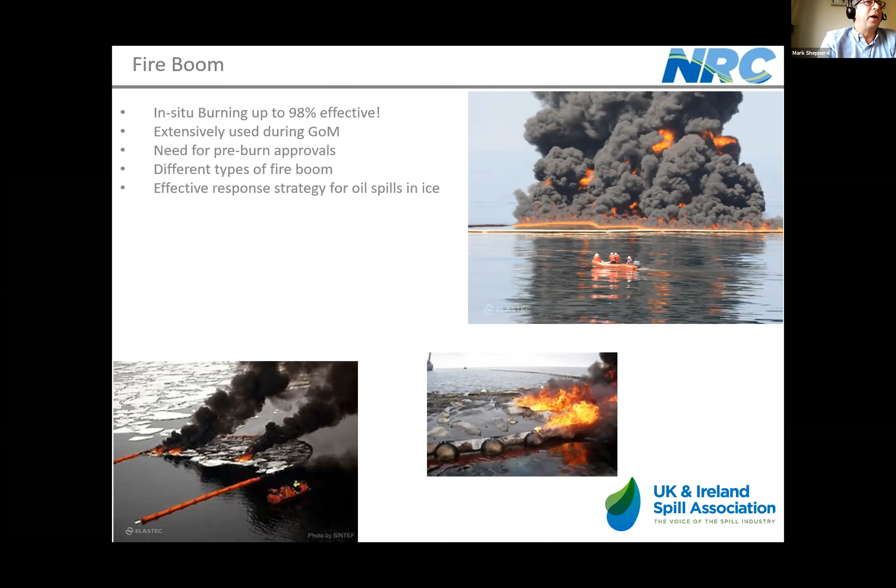Boom failures, these are well-known kinds of things. I'm not intending this as an oil spill training course, but there are many different flaws, from undercuts, splashovers, mechanical failures sometimes caused by pulling the boom too fast. You want to be towing the boom at 0.7 of a knot maximum. Pull it any faster than that and you'll get splashovers or undercuts.

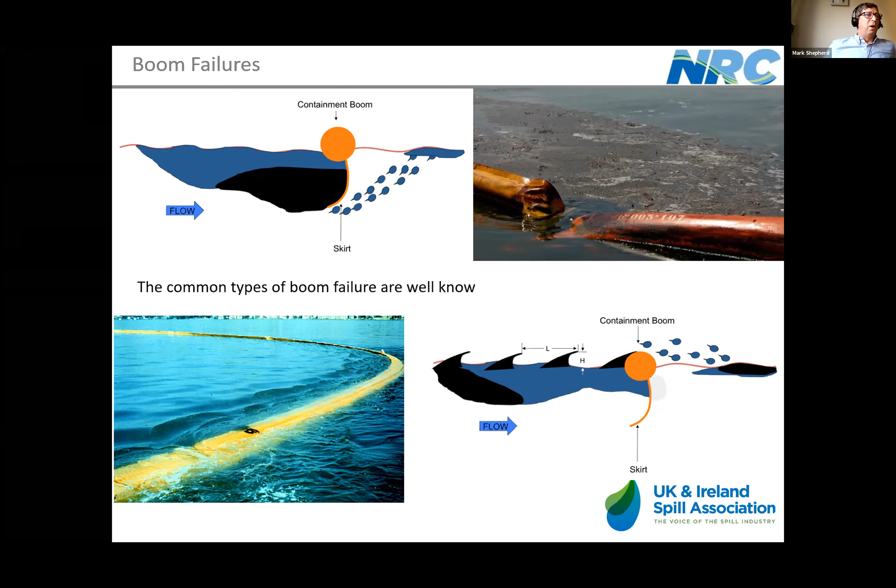You'll also get wave effect splashing over, or just mechanical failures, where the inflatable booms lose a chamber, an air chamber, and it fails, or the weather has affected it. This is a couple of pictures of boom failures.

We talk about, Paul touched on these, the qualities and the types of booms we use. You can see a lot of failures in booms through misuse, abrasion from rubbing up alongside of jetties, vessels, trying to pull them when they're full of water, or even towing them too fast.

One of the things I haven't really touched on, and I think it's going to be used for a later webinar, while we're talking about booms, and I've been through different types, is the newer active boom systems, things like the current busters and things like that. That will be covered in separate sessions.

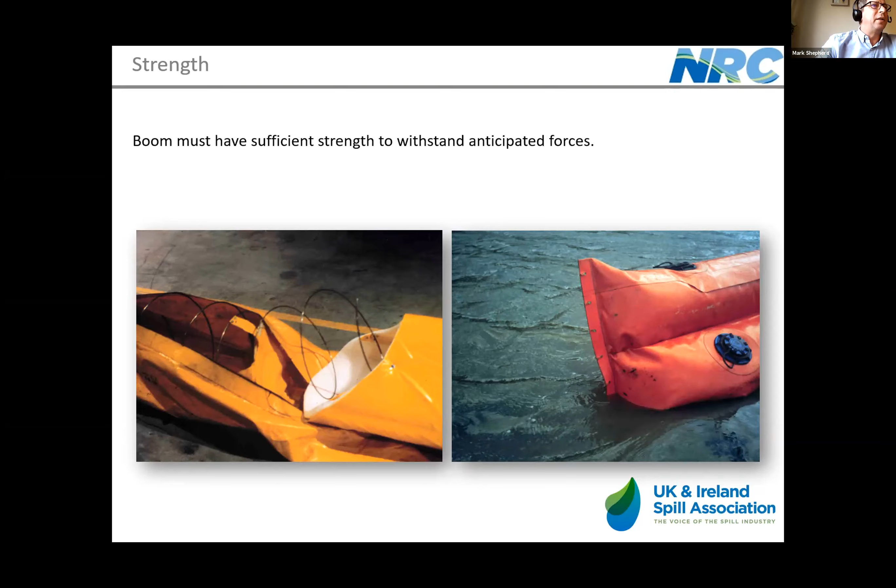I stole one of Paul's slides, because as a responder, we could say all of that's important, but I just wanted to pick up and highlight a few of Paul's thoughts on what's important, especially when I look at things from a UK and Ireland Spill Association standards perspective.

Pre-planning is always important - having the right plans, the right equipment, trained people in place, and the right platforms to operate off of. It's all critical to having an effective response. Make sure your pre-plans, contingency plans, and tactical response plans are right, along with training and competency programs - not just for responders, but for frontline people deploying it first, and vessel crews. Also the right infrastructure: cranes, forklifts. I'll touch on a case study where some of these areas weren't in place and there were failures.

Pre-planning - what's important? Practicality of use, ease and speed of deployment. How easy is it to use, and how quick can I deploy it? Portability is more important around shorelines, beaches, land spills or river spills. Can I get it there safely? How can I get it there? No point trying to get to a remote shoreline with a big boom reel that your trucks can't get to.

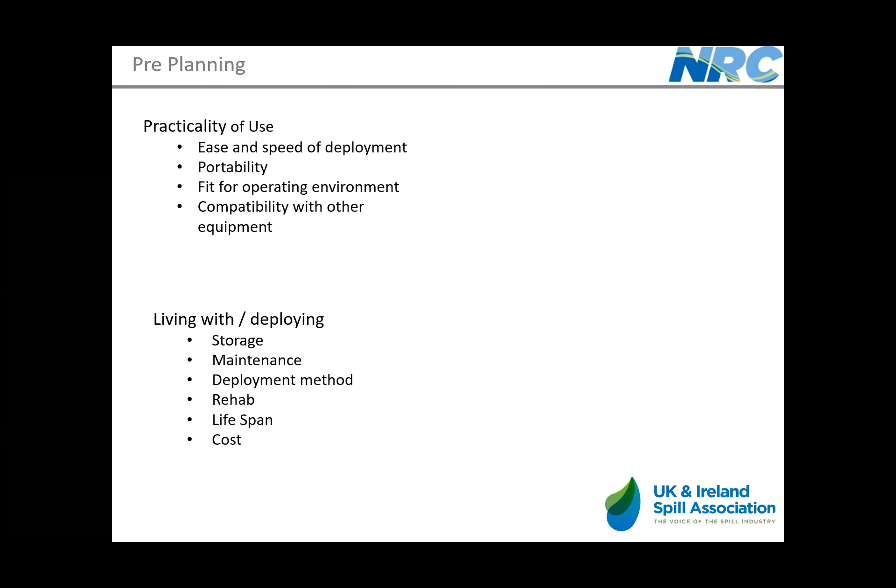Compatibility with other equipment is always difficult from a response side. The client or spiller may have their own equipment, we come with our equipment, or additional equipment is brought in, and it's not always compatible. Ideally all manufacturers would make equipment that goes together, but we don't live in an ideal world unfortunately.

Living with and deploying, storage is also important, as you'll see - I'll touch on storage more later. Maintenance - can it be done by local teams, or do we have to send teams in? Can maintenance be done during a spill? Is it easy to maintain? How easy are boom repairs? Does it have to be vulcanized, making it a specialist repair?

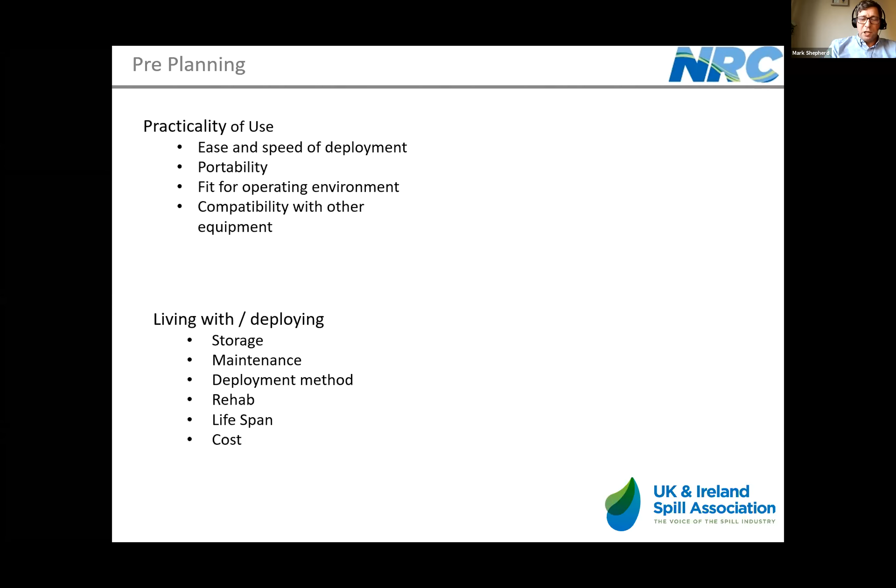So there's lots to consider as part of the pre-planning. As responders, we work with clients on contingency planning and getting adequate equipment in place.

Safety in everything we do is the most important thing. As responders, we want to go to the spill site, and I want everyone going home at the end of the day the same way they turned up. I find these two pictures quite disturbing, but it does happen - there's a spill and there's a rush to get out there.

Things responders should consider: the weight of the booms. I think the UK's manual handling standard is 25 kilograms, but not everyone can lift that, and even those that can - some areas you might have to go into have slippery surfaces from oil. Do you want to be carrying 25 kilograms? It's a consideration. Noise - power packs, vessels, equipment going on are all noisy. Lifting arrangements, which I'll touch on in a bit, along with hydraulic lines.

Here, working near water, as you can see, no one's got life jackets on. They were knee deep in oil with carcinogens. For responders, having safe systems of work and standard operating procedures are critical, as well as trained and competent responders - keeping your training and skills up, not just relying on skilled responders coming in.

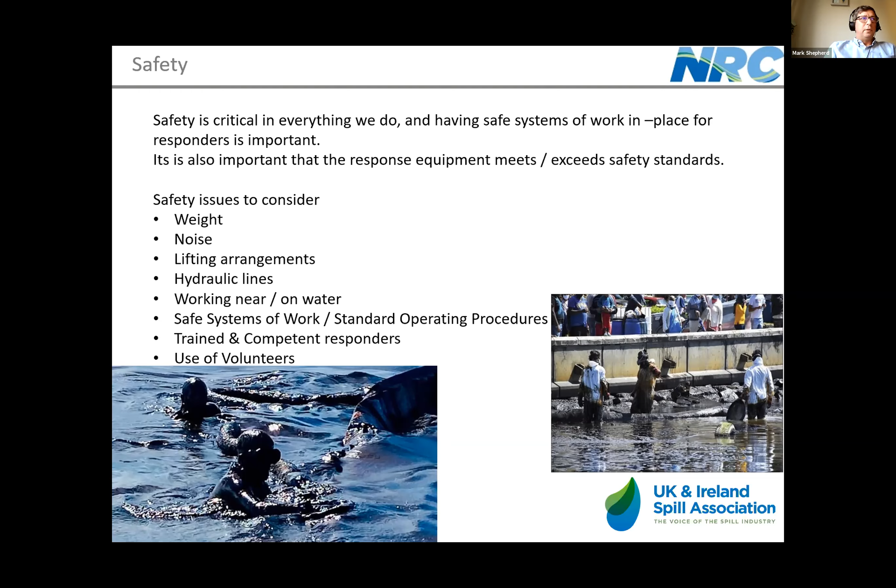Weight is an important consideration, especially around shorelines. Knowing the safe working loads for all equipment, and having that readily available on the boom, is important. A lot of the time you'll turn up and not know how much equipment weighs - like I said, 25 kilograms is the manual handling standard in the UK. Look at these guys pulling that boom up the slipway - that looks pretty heavy, probably damaging the boom at the same time, as well as probably damaging themselves. Loading vessels.

You've got to know your point loadings of your vessels when you put boom reels on there or load equipment on it to make sure you're not making that vessel unstable. Great in calm waters, landing craft don't tend to be the stablest of vessels anyway, so start getting a bit of chop or wave movement in there, and that vessel becomes very unstable.

So I think there's a lot that as responders, and as people like UK and Ireland Spill, we need to sort of bring in standards where we do know the weights, the safe working loads of equipment.

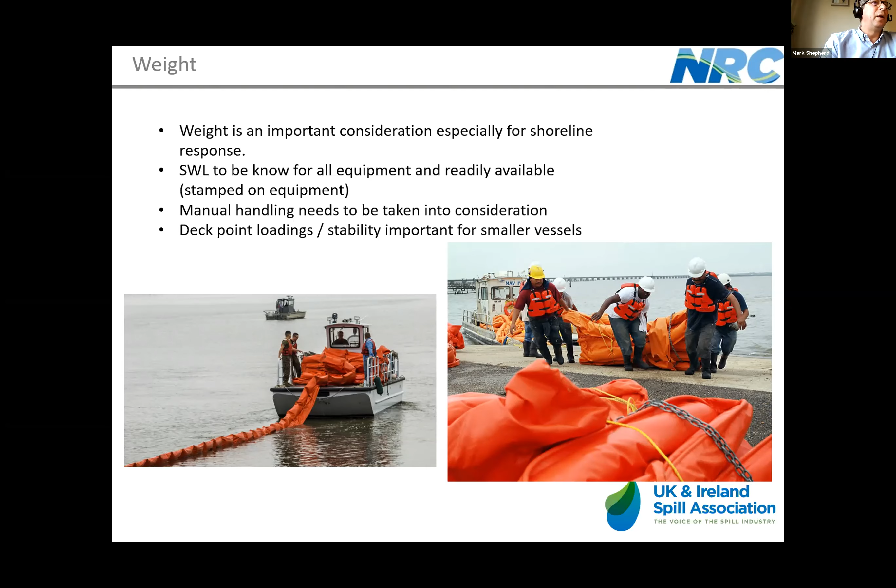Lifting. This has been one of my challenges over many years, having certified lifting points on equipment. Now for the oil and gas industry, there's a big drive nowadays where our customers and clients want equipment in DNV containers, up to the DNV 2.7-1 offshore container standards.

And that's fine, but some of the reels, boom reels, don't fit into the standard size containers. So then you either have to get a modified reel or a modified container. But if you look at boom reels generally, it's often down to whoever's procuring, buying those reels to stipulate forklift pockets and lifting points. Lifting points generally aren't tested or stamped to a standard. Slings, yes, but the lifting points aren't.

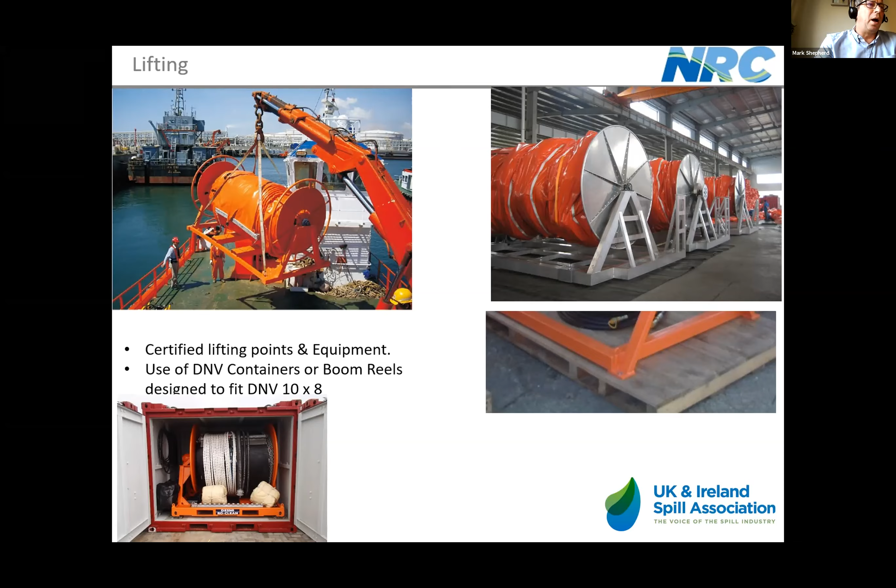Paul touched on storage. Storage for booms always has to be a consideration. You can see some of these foam filled booms, 200, 400 meters of that boom takes up a lot of space in a warehouse. Therefore a lot of the time it doesn't get stored in warehouses, it gets thrown out into the yard where it's stored.

Containers are great, shipping or storage containers are good, but it depends again on the climate you're working in and the condition of the containers. They often get left to rot, and we'll find when we go out there to do maintenance or training that the equipment's not in such good condition. So I think the awareness of not just response organisations, but companies buying oil spill equipment, should be aware of their storage capabilities and what it really means.

Rehab and maintenance, again, a consideration for responders. Field maintenance, it's not always easy to repair things on site. You don't always have the repair kits you need unless someone has stipulated it when they've brought the equipment, to have spare parts in there. It's not there. For booms, it's very difficult to repair during a spill. So making sure that you've got an ability to jerry rig, fix things on site, is important.

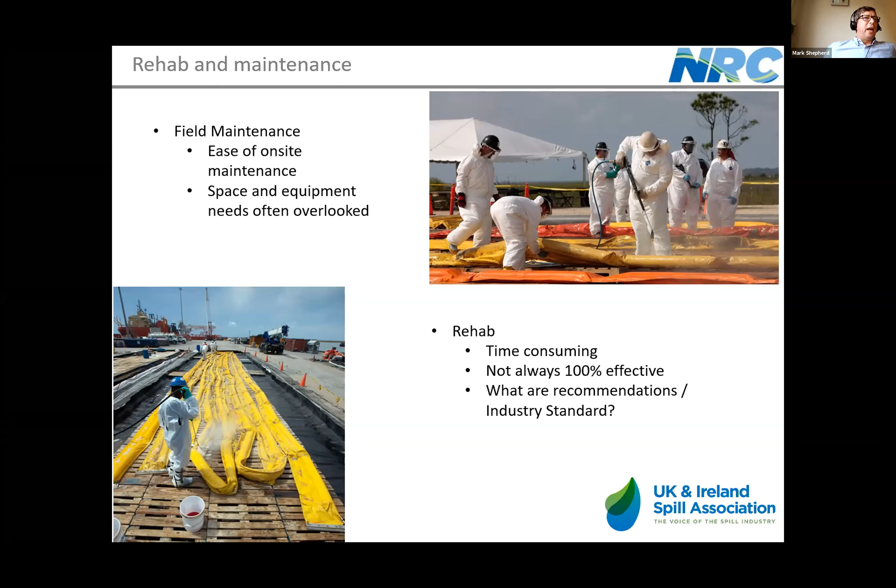And I guess it would be interesting to have recommendations on effective rehabs, what industry standards are. Again, developing standards and recommendations. This was touched on last week, setting standards on the skimmer ones.

So should we have a standard of fittings for connectors? Should we use the ASTM ones or other ones? It's a big ask in an industry of this size, especially when it's done internationally. Hose maintenance and life cycles.

Industry standards would talk about a 5-year life cycle of a hydraulic hose. NRC has an industrial services division with ultra high pressure and high pressure jetting units. Hoses are often changed every 5 years.

But then if you look at a piece of oil spill equipment, it may have been run up once a month if it's lucky. You could go 5 years and that piece of equipment hasn't seen 5 years life, or that hydraulic hose hasn't seen 5 years worth of use.

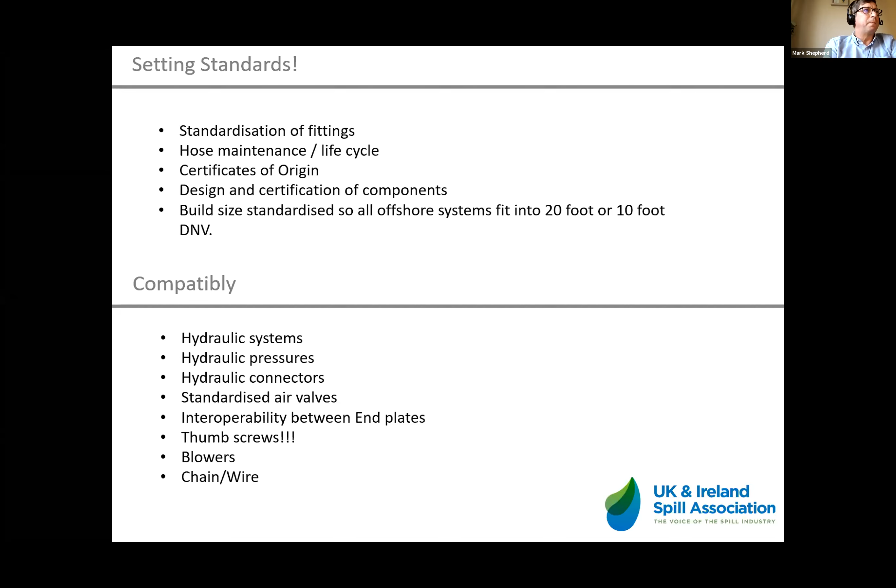So I wanted to kind of close out with a bit of a case study on a boom deployment. We were asked to look at with one of our clients overseas a failure of an offshore boom deployment. So basically, having looked at it, there were several things that went wrong.

But initially it was an inexperienced team that tried to deploy the boom. The crew wanted to do it as part of preparedness for a drilling campaign, rather than calling in a response team to do it. The boom, the initial boom, when we looked at the configuration of what they'd done, wasn't really fit, laid out on the back of the deck properly.

You can see a huge deck, but everything was put nearer the stern. The boom reel was span-setted into an open top basket, and the span sets broke.

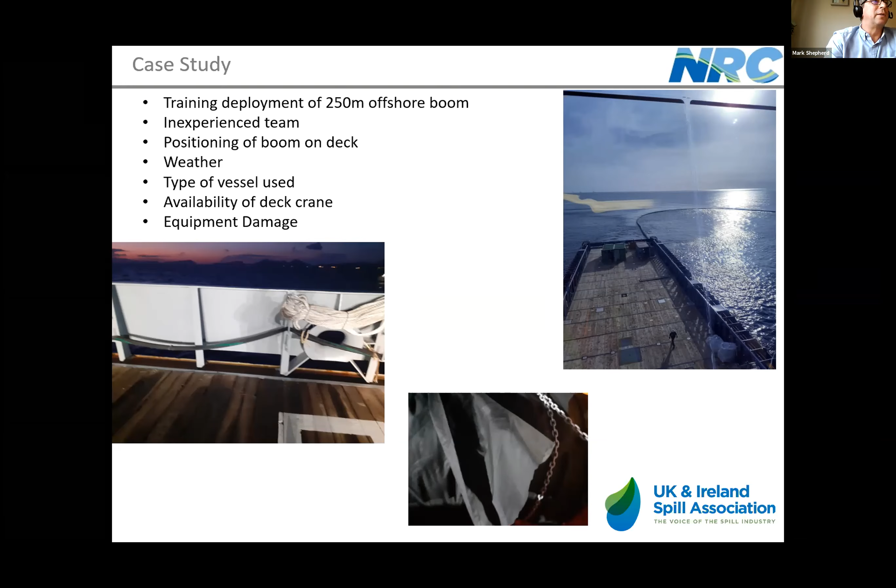So it doesn't always go well out there. I was going to do a case study on a training exercise, but it doesn't always go that well - it can fail, and it often does. So that's kind of me. I'm going to unshare my screen now and hand back to Mark.